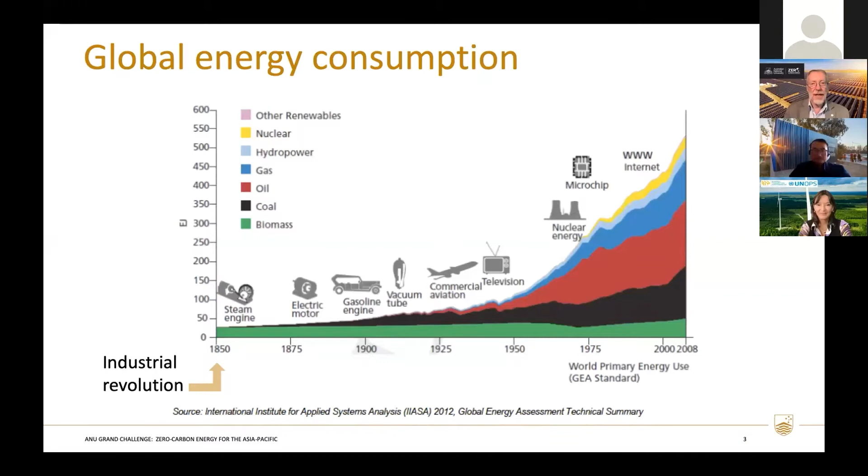However, I will state at the beginning that other renewables, mainly solar and wind, will soon replace all carbon-based energy systems. And indeed they need to do so in the next decade or two for us to reach our global climate change targets.

So this will be a massive transformation. Everything you can see on this graph that uses carbon-based forms of energy will soon be transformed to renewables. This will be a change comparable in scope and magnitude to the Industrial Revolution at the beginning of this graph.

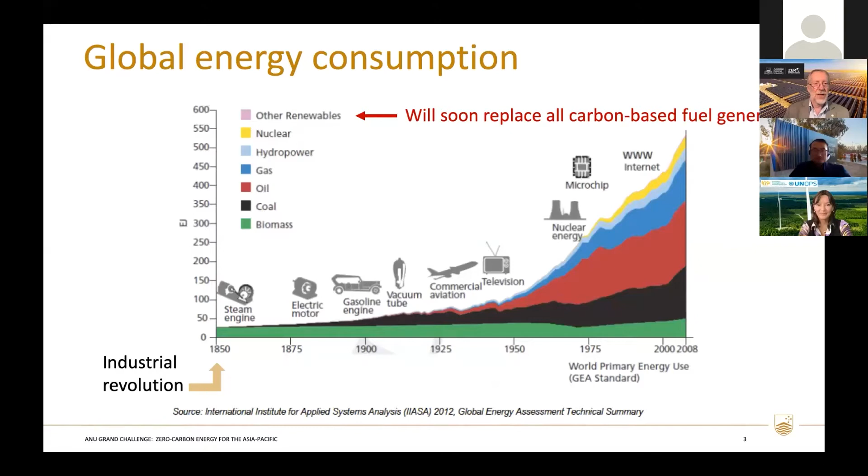So let's compare us, in terms of the energy transition we're undergoing now, to the Industrial Revolution. The Industrial Revolution was by and large driven by technology. It was largely unplanned and unforeseen - these developments happened without people having any previous knowledge of the new changes. As a result there was huge social and economic dislocation, governments played very little role, and the end result was largely chaotic.

Let's contrast this with what we might expect for the energy transition. It's similar in scope and magnitude to the Industrial Revolution, but it's driven mainly by climate change, and facilitated by possibly even fortuitous advances in technology, which happened to occur at exactly the right time in history to allow us to mitigate the effects of our changing climate.

In this sense it's completely foreseeable and can be planned, because we understand what needs to be done, and we can avoid social and economic dislocation in the energy transition. For this reason, government has a key role in the planning process to make this happen in a smooth, efficient, and economically effective way. So the energy transition doesn't have to resemble the Industrial Revolution - we know it's coming, and we have the ability and tools to deal with it.

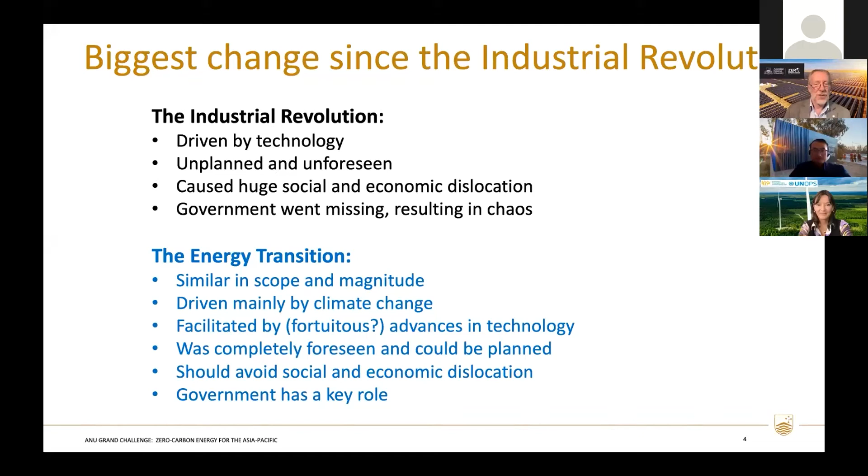Indeed, the energy transition is happening as we speak. This graph shows the new energy capacity additions in gigawatts per year for a range of different energy generation technologies. We can see that solar PV, photovoltaics, and wind are already the dominant forms of new energy generation additions in the global energy system.

Gas is more or less constant. Coal seems to be declining. Hydro is constant, if not declining. Nuclear has bubbled along at the bottom a bit, along with bio and a few other smaller forms of generation.

It is really this ramping up of solar and wind that is changing the energy systems as we speak, and it's either the constant or the declining role for fossil fuels that will be a feature for the energy transition in years to come.

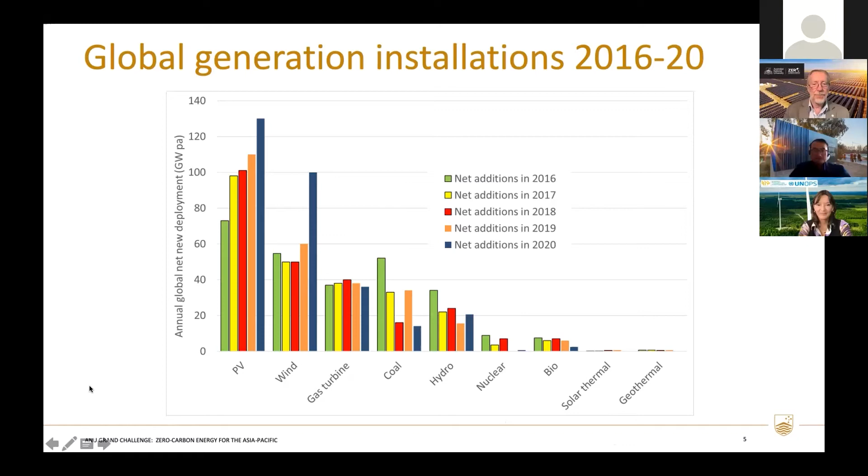So Australia, because of this change in the rate per person, is really at the leading edge of the energy transition. We are installing more renewable energy per person than any other country, and so we are learning very early on the lessons of the energy transition. It's worth understanding what's happening in Australia so that other countries can benefit from this learning process.

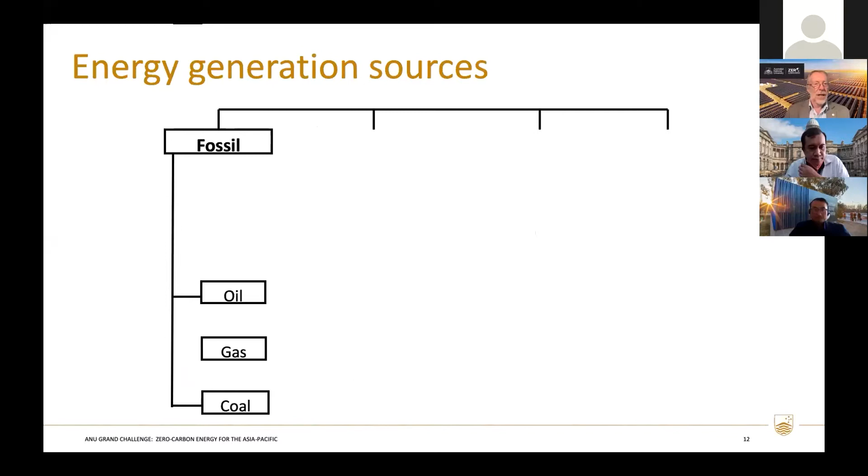We currently have generating sources from fossil fuels, oil, gas, and coal, and we obviously need to replace them eventually. The question is, what do we replace them with? The choices are, first of all, nuclear power for those countries that allow it. Remember that Australia does not allow nuclear power. In fact, nuclear energy is forbidden by law in Australia, one of the few countries in the world to do this. But other countries have embraced nuclear power, and indeed countries like France get the majority of their electricity from nuclear power. So nuclear power comes in two forms.

There's nuclear fission, which is the breaking up of uranium nuclei, releasing energy. That's a conventional nuclear power station. And then there's nuclear fusion, which is the joining together of lightweight nuclei of hydrogen isotopes. This is the energy that powers the sun. At the moment, there is no fusion power on Earth, but there is massive investment from all the major economies in a fusion power reactor in France, which will harness the power inside the sun in a controlled environment here on Earth. This has the big advantage that the fuel needed, isotopes of hydrogen, is readily available in the ocean, and there are no byproducts from nuclear waste.

So that's some way off. It probably won't happen until the first demonstration, maybe in the 2030s, and it'll be the middle of the century by the time the first commercial reactor might be developed anyway. So this is well beyond the time frame we need to address climate change.

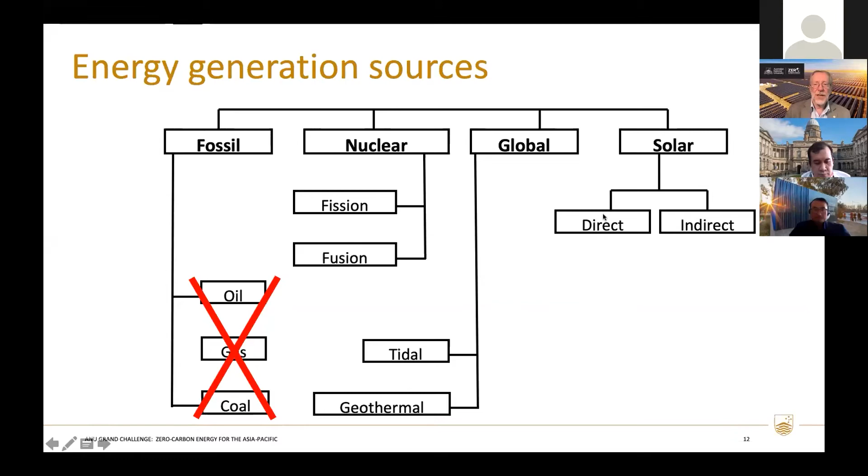Then finally there's solar, in two forms: direct and indirect. Direct solar is all the solar we know about. There's solar heat, for example heating water on your roof from the thermal energy of the sun. There's solar photovoltaics, or PV, which are solar cells—the solar panels on our roofs or on solar farms that generate electricity directly from sunlight. Then there's thermal electric, which concentrates the sun's heat to create, for example, steam to drive a turbine. And there's thermochemical, which similarly concentrates the sun's heat and stores it in chemical forms, like ammonia. Those are all direct solar.

Then there's indirect solar. The sun drives a lot of processes: convection causes wind, and we harvest wind using wind turbines, so that's driven by the sun. We also have hydropower, essentially brought about by the sun evaporating water, which condenses into clouds, falls as rain into a river catchment, and is then harnessed as hydroelectricity after being stored in a dam. Then there's wave power, driven by wind, which is also driven by the sun. And finally there's biomass—plants that capture sunlight through photosynthesis, and we harness the stored energy in the plants.

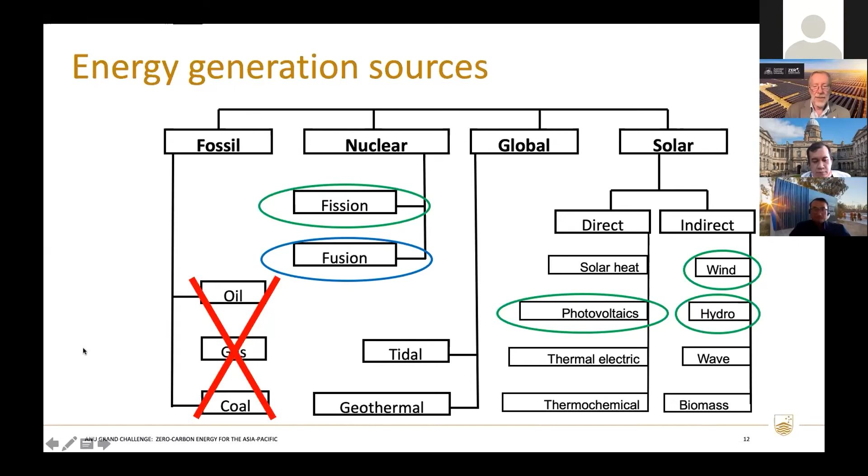So that's really a quick summary of where things are heading at the moment. How does this all work out? How do these technologies take over from fossil fuel, and which one wins the race?

So now I'm going to talk about how this happens, and to understand that you have to understand what is called the learning rate, which is the change in the cost of a particular item, which could be a solar panel or a wind turbine or a coal-fired power station or a car or a television set. It's the change in the cost of that item as the number of units of that item increases in the production process. In other words, it's a process of learning through research, through innovation, improvements in the production line, as you make more and more of the particular item, that causes the cost to go down.

So what you see is early on, the learning rate is very rapid as research and innovation helps reduce the cost, and then it gradually plateaus out until the technology is mature. And then along comes a new technology which might compete with the old technology, and where these learning rates cross is the opportunity for the new technology to then take over from the old technology. At that point, you will see replacement of the old technology by the new technology. So that's what learning rates are all about.

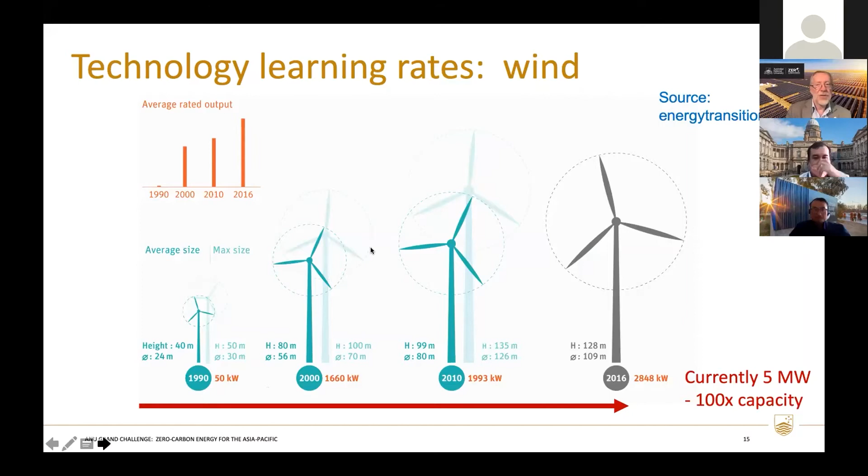Okay, so that's what eventually will happen. These renewable energy systems will outcompete the fossil fuel systems based on economic cost. How do we actually quantify this?

We use a formula called the levelized cost of electricity. Many of you will be familiar with this term. It essentially says on the top of the equation, we take all the costs involved in generating the electricity we're talking about, whether it's a solar panel or a coal-fired power station, and then we divide by the amount of energy in electricity that is produced.

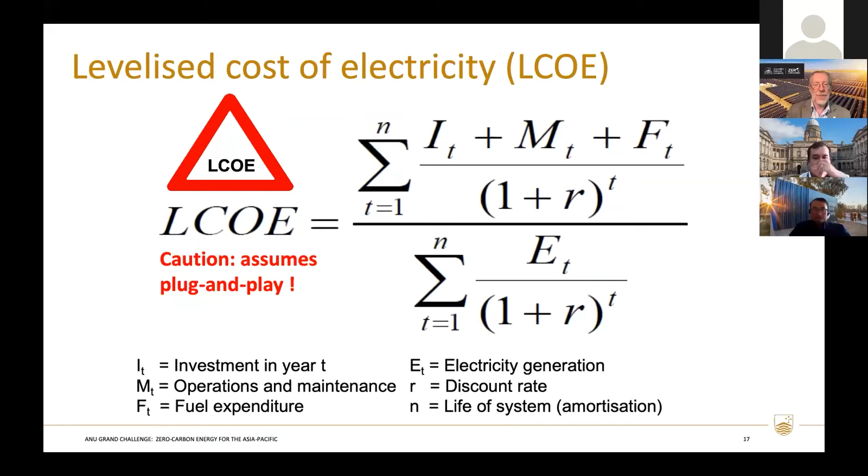But a word of caution, this assumes that we have plug and play. In other words, let's say we decommission a coal-fired power station and replace it with a wind farm in the same place. Now, of course, there may not be much wind in that location, so we need to move the wind farm somewhere else where there's more wind, and this would mean extra transmission costs, et cetera. So just be aware that it assumes plug and play, but nonetheless, this is quite a useful comparison.

And then finally, just to point out, where does the learning rate come in? It's in this term here, the investment cost. If the investment cost decreases every year, as it does with solar panels, for example, then the cost, the LCOE, will decrease as well. This is where the competition element comes in.

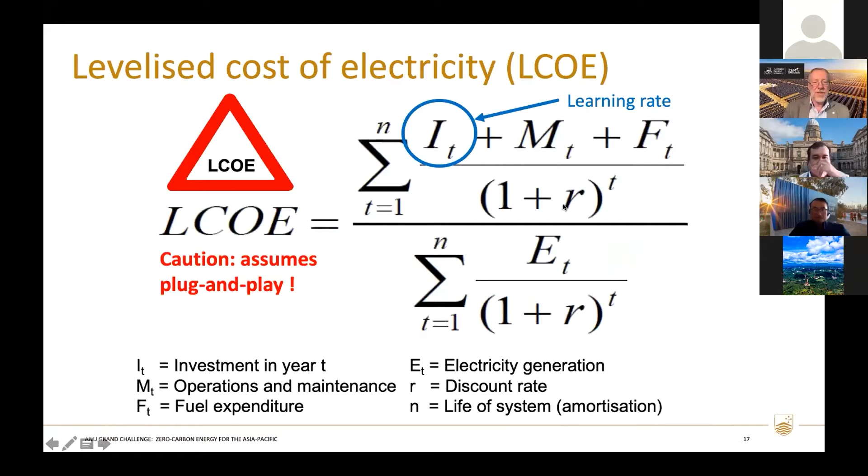So let's now look at how the levelized cost of electricity of these various technologies compare. We'll use an Australian example because this is very important to understand, because as I said at the beginning, Australia has the highest rate of installation of renewable energy per capita in the world. So we're going through the energy transition more rapidly than anyone else. And this is driven by the learning rates for solar and wind. So let's understand that in terms of LCOE.

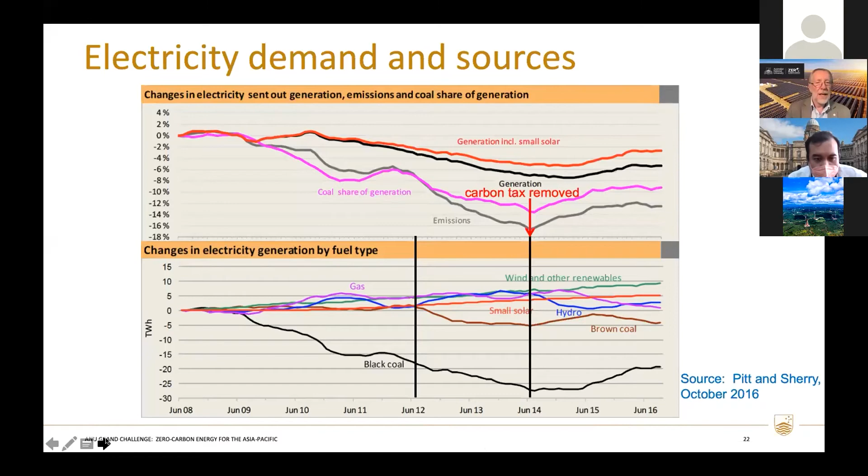In 2017, the chief scientist, Dr. Alan Finkel, was asked to review the national electricity market. Following this period of policy uncertainty, he argued in this review document, published in 2017, that consistent long-term measures are needed to address climate change and to provide industry certainty so they can invest.

Of course, there had already been issues with the carbon price, which had been introduced before this review and had been ruled out by the then government, a coalition conservative government. The party room of the coalition government ruled out carbon pricing, and it was removed in July 2014, so that was no longer an option for the future electricity market.

So the chief scientist proposed a new idea: an emissions intensity scheme for the electricity sector. This was soon ruled out by the government. Then he proposed a new clean energy target for the electricity sector; again this was ruled out as a policy option. Finally he proposed the National Energy Guarantee, which meant you had to guarantee at some point in time a certain amount of energy produced by renewables.

This again was ruled out by the coalition government, so all of this produced more uncertainty in the policy settings. For a very long time in Australia, there has been very low investment in new energy systems. Investment in the energy system essentially was stalled during this period, up until 2017 or so.

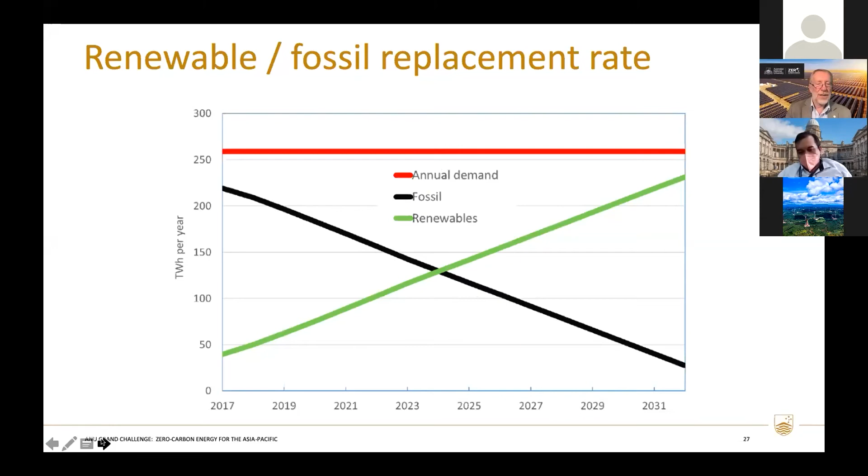And of course, this may not happen because demand may change. Indeed, we might expect that demand will go up. And why is that? Let's think about why demand is going to increase.

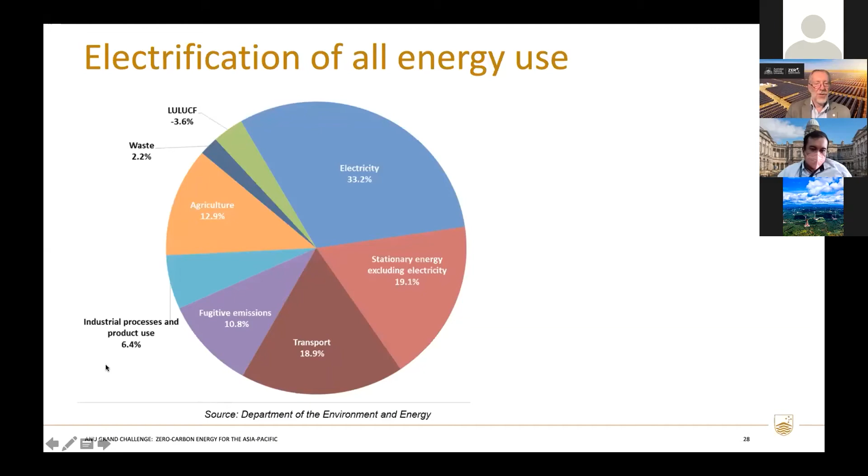Well, first of all, we know we're going to use renewable energy to replace the electricity sector. That's a third of Australia's greenhouse gas emissions right here, and indeed this is the easiest way to meet our Paris target of 28% emissions reduction. By simply converting the electricity sector to renewable energy, we can achieve that by 2030. But if we electrify all the other sources of emissions in Australia, we can do that, for example, for stationary energy generation—this is space heating and things like that. We can replace gas heaters with heat pumps driven by renewable electricity, and we can get rid of 19% of our emissions that way.

Or we can convert internal combustion engines in the transport sector to electric vehicles using renewable energy and get rid of, again, 19% of our emissions. And we can do the same thing if we no longer need fossil fuels—we get rid of fugitive emissions from mining coal and gas, and replace industrial processes like cement making, iron and steel with new processes that use only electricity and hydrogen, for example, in the case of steel. So if we do all that, using renewable energy to electrify all the other sectors, we'll probably need 2 to 3 times the amount of electricity as we do now. And this, of course, means demand for electricity will increase.

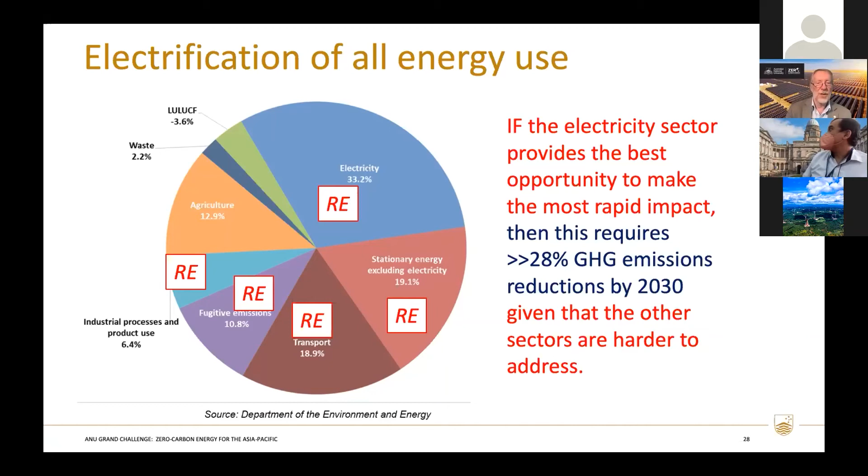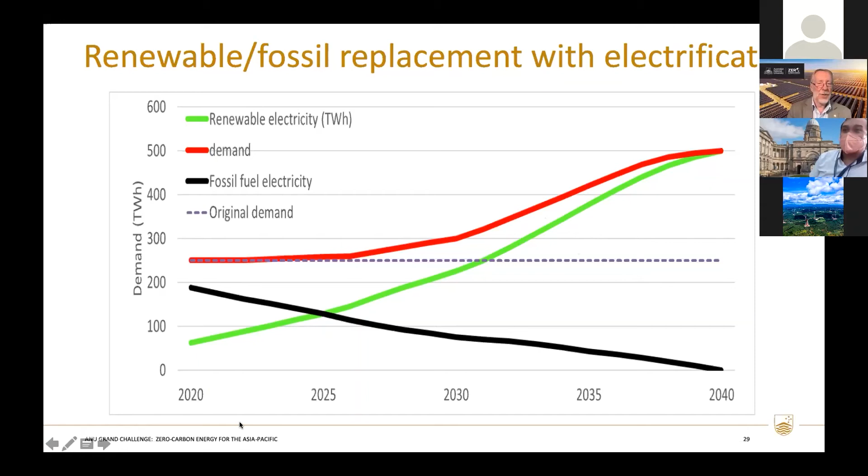That's not true. In America, it was true - coal was replaced by gas because gas became very cheap and had huge quantities. So they undertook an intermediary transition to gas.

In Australia, we're going straight from coal to renewables, and gas won't play a role in the transition as a fuel. It'll play a role in a different way. Renewables are already more than 30%, gas is around 5% and decreasing. Gas will play a role as a peaking fuel, in other words to provide electricity at times when solar and wind aren't operating, for example at the evening peak. We probably don't need much in the way of new gas installations to do this. So gas will have a role as a peaking fuel to smooth the transition to renewables - it won't be a transition fuel itself.

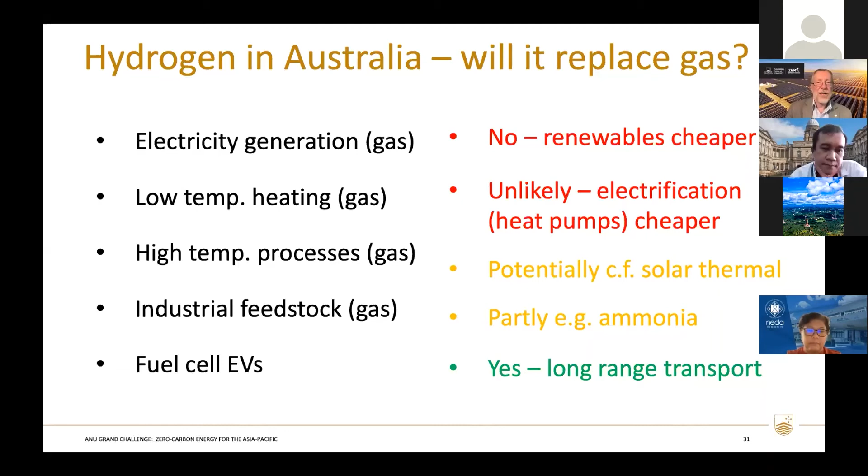So that's just my personal thoughts on the role of hydrogen in Australia. Other countries will be quite different, but in Australia I think the big role for hydrogen will be in exports. As I said right at the beginning, it will dominate domestic hydrogen consumption because the export opportunities are so big.

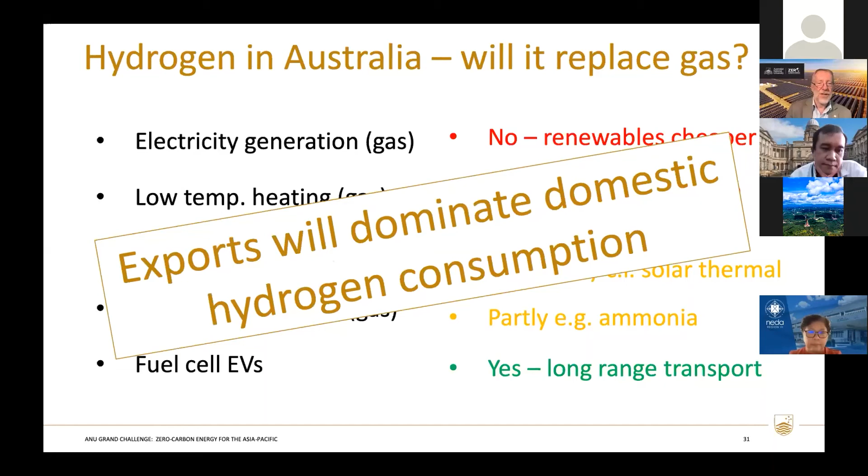So how high can renewable penetration go? Well, once you get more than 50% renewables, when renewables take over from fossil fuels, you need to be able to cover the intermittent nature of solar and wind - cloud formations cover solar farms, the wind sometimes doesn't blow at wind farms. You need to address this intermittency.

You have three options for doing that. The first is to overbuild supply, and to have your supply in different locations - that's the advantage in Australia, we have a huge geographic spread of our national grid, covering 5,000 kilometres, so somewhere it will be windy, for example. So overbuilding supply is one option.

The second is to build additional storage capability, mainly through pumped hydro, which can store enormous amounts of energy. You might have heard of the project called Snowy 2.0 - this is the big Snowy hydroelectric scheme being expanded to store electricity by pumping water uphill in the Snowy Mountains scheme in Australia. Or you could build batteries around the country for local small-scale storage.

And then finally, you need to build additional network infrastructure, because you need to access renewable electricity wherever it is most effectively generated, and this is often not where the demand centres are in the cities - it's often in the countryside, or in windy regions at the coast or on the hills.

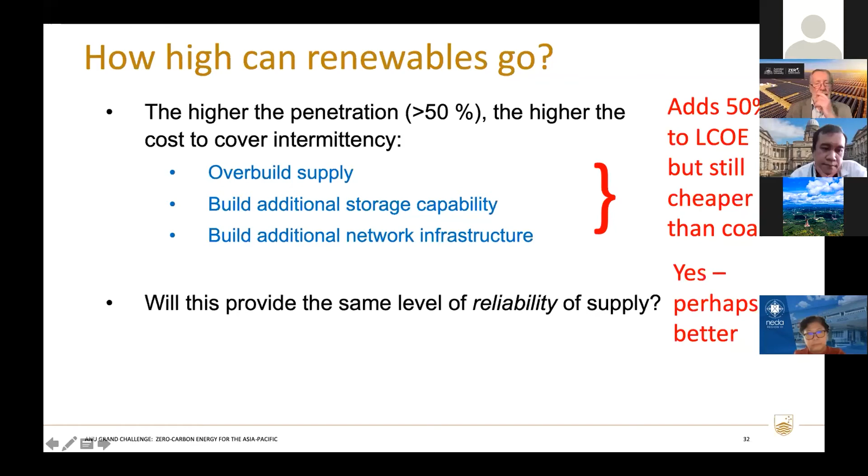And it adds about 50% to the cost of a 100% renewable electricity system. But again, going back to the LCOE discussion, this is still cheaper than building a new coal or gas-fired power station, and certainly cheaper if you include a carbon price or carbon capture and storage in the LCOE for fossil fuels. The next question is, will this provide the same level of reliability of supply? I would argue that yes, it can, and perhaps even better, and we'll come to that in a minute. But it's all around the fact that you've got this distributed system with multiple redundancy.

Will it provide the same level of security, for example, during increasing extreme weather events or cyber attacks? Well, that's a very good question as well, and we'll talk about that in a minute. Maybe is the answer. We can have that discussion.

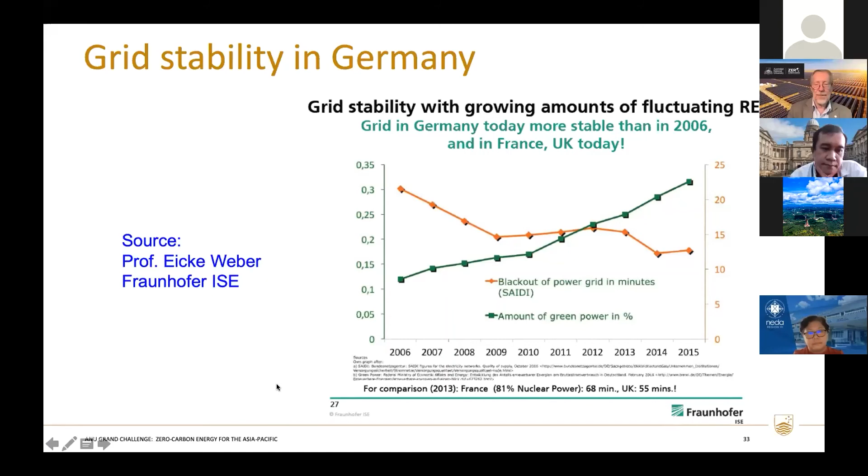Okay, so we might pause that, and I've got a question that I'd like to hear an answer from each country. Maybe one person from Vietnam, one person from the Philippines, one person from Indonesia could give me the answer. We've been talking about what is the renewable fraction in your country. In Australia at the moment, it's 31.4% of the national electricity market in 2021, that was last year. So if we stop sharing the screen, someone from each of your three countries can tell me your fraction of renewables currently, and we can do a comparison.

So stop share. And I see that we have somebody from the Ministry of Energy and Mineral Resources in Indonesia. Is that Aulia? Would you like to tell us what the percentage is in Indonesia at the moment?

Yes, Professor Ken Baldwin. My name is Aulia from Ministry of Energy and Mineral Resources. As for the electricity market in Indonesia, currently the renewable portion is about 11.7% at the end of 2021, and mostly our supply is from hydro power plant, and secondly from geothermal.

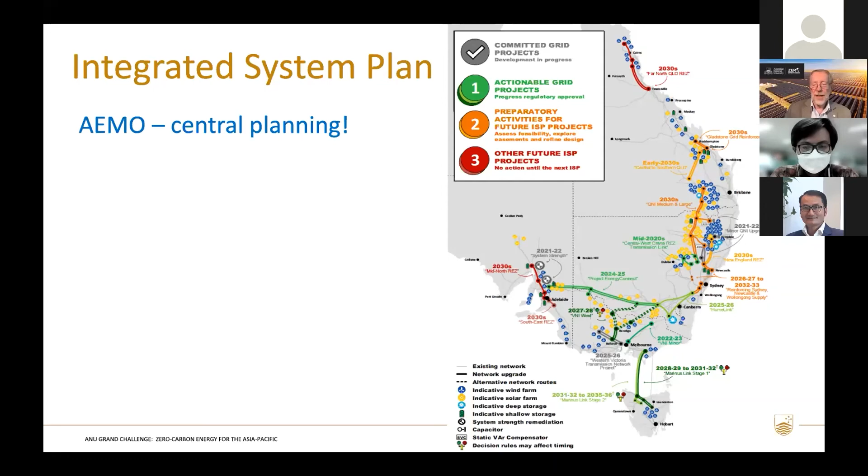So this moves away from the free market approach that's prevailed in the past. Now we have central integrated system planning: renewable energy zones, connection using high voltage direct current transmission lines between major demand centers and generators, and backing up using storage, plus frequency and voltage control, particularly from batteries, which provide excellent capability in that area.

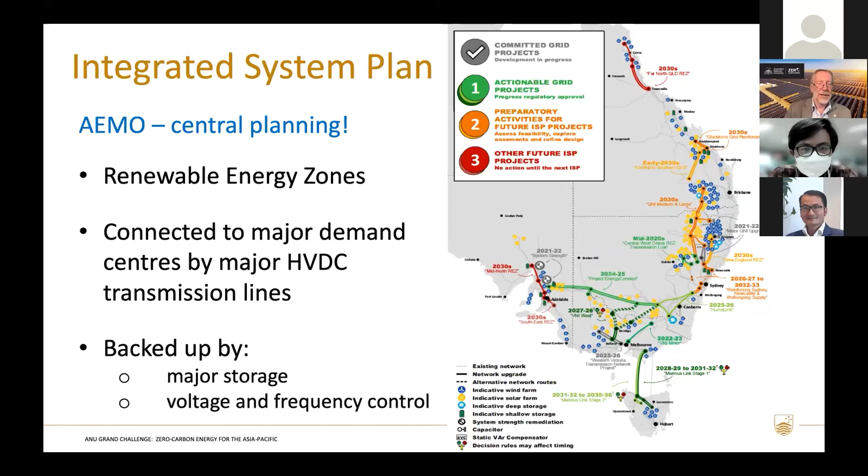So what will this look like in the future? It will look much more like the Internet of Energy. There will be millions of generators, millions of storage centers. People will have batteries in their homes, in their cars, in the neighborhood, in the city. There'll be pumped hydro up and down the country, and demand response with millions of participants. Each household could turn off its air conditioning if paid to do so at peak demand times, or a major industrial user might turn off a freezer for an hour to save money and earn a bonus for demand response.

The scale of this will vary enormously too—from kilowatts in rooftop solar to gigawatts in major solar and wind farms, kilowatt hours to terawatt hours of storage, whether household batteries or major pumped hydro schemes. Very much like the internet, the future electricity system will have much greater interconnectivity between these millions of different nodes—it will resemble the Internet of Energy in all these ways.

What does this mean for the robustness or resilience of the system? This is all about the thinking around resilience and planning. I think the good news is there will be more robustness because you've got greater multiplicity of nodes, greater redundancy, and a greater multiplicity of transmission pathways—again, greater redundancy in how you move electricity around.

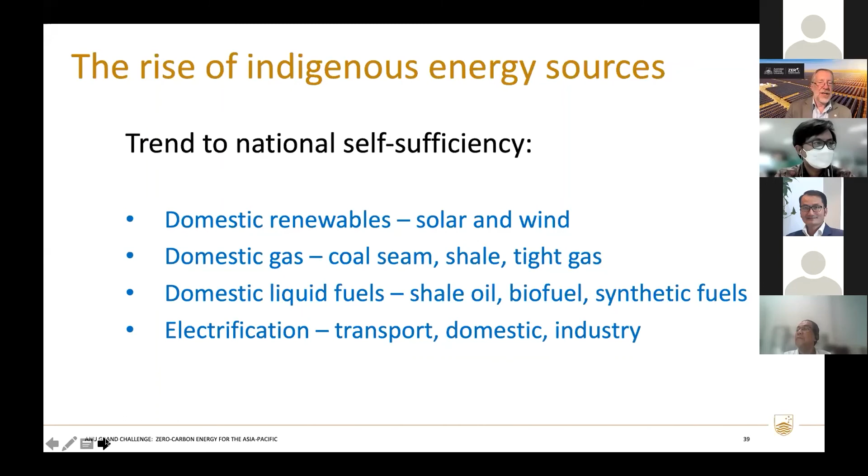There will be domestic liquid fuels, again from unconventional production - shale oil, biofuel, synthetic fuels. And through the electrification of things like transport, domestic systems and industry, the ability to rely on these domestic sources will improve. And in countries which embrace nuclear power...

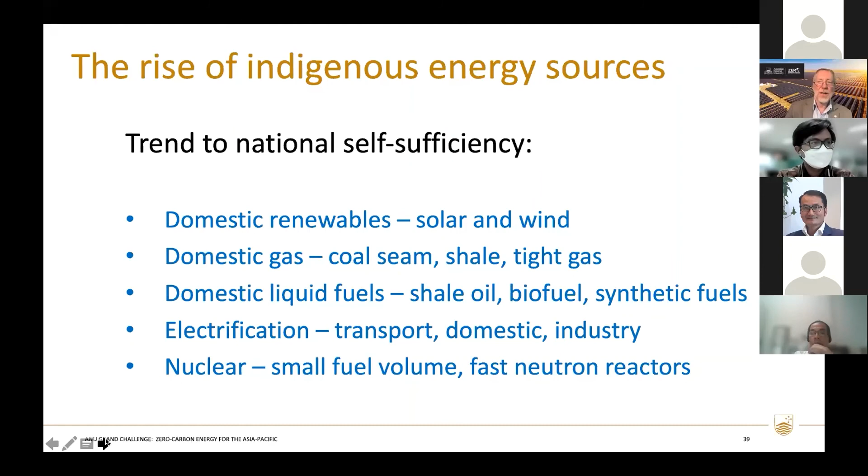because of the small volume of uranium needed to fuel the power stations, this is less of a security risk. And indeed, in the future generation of nuclear power stations, which use fast neutron reactors, you can reuse the spent fuel from old nuclear power stations, so you don't need to import uranium at all. So all these trends to national self-sufficiency through energy sources operating within countries will improve energy security.

So the good news is that these new energy capabilities will improve our energy security. There'll be fewer energy resource wars as a result in the long term. Nobody is going to go to war over somebody else's solar or wind. There'll be less opportunity to interdict supply chains, so the sailing of oil and gas ships through the Straits of Hormuz will be a thing of the past for people to worry about.

There might be some domestic energy security issues in order to balance the electricity supply, but we've already seen that you can do this via the Internet of Energy by having greater connectivity, more storage and multiple redundancy. In countries which have nuclear power, there's the risk of potential nuclear proliferation, but again, through good governance and good management systems, this risk can be ameliorated.

There will be cybersecurity risks by interdicting disseminated energy systems with more entry points. But as I pointed out, it's perhaps just as robust to have an Internet of Energy as it is to have a centralized system with large thermal generators at risk of cyber interdiction. And finally, the general resilience of the Internet of Energy in our planning going forward, as we've seen in Germany and other places, will make the future energy system more robust, so energy security will improve.